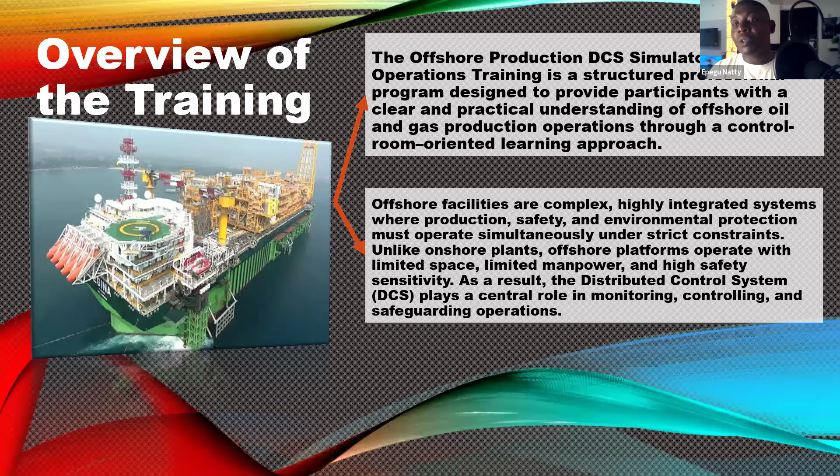And when things are automated, it means the control room is what is doing almost all the work. We have field operators in the field that are going to be doing the field operations, but most of the things are automated, which is why the DCS operation is very crucial, in the sense that you stay in the DCS to monitor, to control, and also ensure that you safeguard the entire operations from the control room.

Now, this training is going to be focusing on offshore operations. We are not going to be talking about design, understand this, we are not talking about design. We are going to be using the HMI to show you how everything is going to work, and all the scenarios in case there is any upset on the plant and all the rest. We are going to do that.

So let's look at the purpose of this training. The primary purpose of this training is to bridge the gap, I think I've said this earlier on. We try to bridge the gap between your theoretical knowledge and actual practical knowledge of what is happening in the field. A lot of engineers, especially undergraduates and non-graduates, in school we are taught the theoretical aspects, and you're told that the separator does this, this does that, but the practical knowledge is actually not there, it's missing. Which is why we are here to bridge that gap.

So at the end of this training, these are some of the things that you're going to go home with. You're going to understand how the overall configuration of the offshore production facility is. You're going to be able to identify major offshore production systems. And then you're also going to be able to interpret the DCS. Now, whenever you see the DCS, you're going to be able to know what is going on, so you're going to understand that.

And then you're going to follow up typical startup and shutdown. If you want to start up the offshore plant, what are the procedures you follow? You're going to understand that. You're also going to recognize alarm situations. When there's an alarm on your screen, you're going to understand why the alarm is there and how to rectify it. And also you're going to understand the role of interlocks and permissives. We're going to talk about interlocks and permissives in day 2 of our training, so let's say tomorrow we're going to do that.

So basically the scope, I think I'll mention some of this. We have a production flow from wellhead through the manifold, and then to the topside where we have the separation and treatment of the fluid, which are your oil, your gas, and produced water. Then we have the gas handling, compression, and then conditioning to remove hydrogen sulfide. We have produced water treatment and disposal or injection. So we're going to look at this.

This is very, very important. Then we are also going to look at seawater treatment. So the FPSO or the offshore platform is situated in a sea where you can't actually be importing or bringing water from outside. So it means you have to treat the seawater and then you can use it for either domestic use or injection to a well. So we're going to look at that.

Then we have chemical injection, to avoid corrosion and a lot of other things. So we have that.

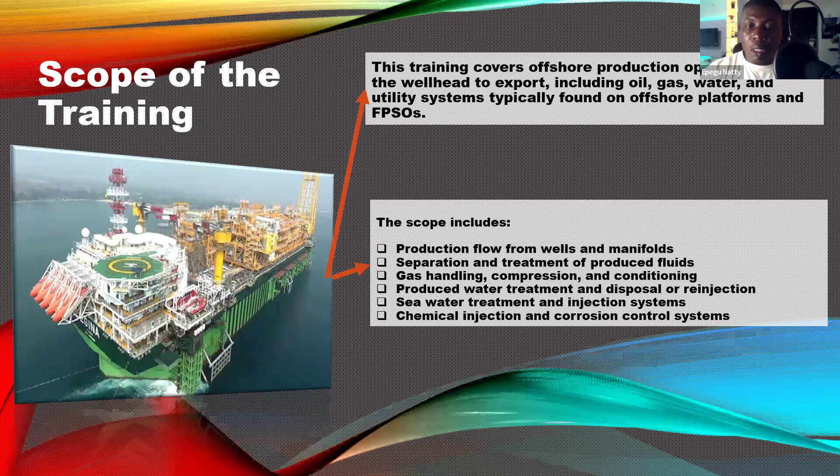So this training does not focus on process design. I think I mentioned this, line sizing, detailed mechanical design. So for mechanical guys that are here, we are not doing mechanical design in this training. For the process personnel, we are not doing process design, but we are doing process operation. So we are not going to be doing equipment fabrication, and we are not going to be doing vendor-specific control systems. We are not doing valve sizing and all the rest. Instead, we are emphasizing on operation. Operation is why we are here.

Okay, so moving forward, our audience, I think we don't need to talk much on this. We need an undergraduate student to be here. We need a graduate student, process engineers, instrumentation and control professionals that want to just know, have an idea or understand what is going on here. And then we have process safety technicians and engineers. We also need chemistry students because in offshore operations we have the lab, and the lab are the ones that actually take samples and give you results. So we need them also to be here.

So basic knowledge - all you need is to be an engineer, or to study engineering, or chemistry, or industrial chemistry, or any of them, and also to just have a general idea of oil and gas and its terminology. Also understand fluid flow concepts, pressure, temperature, and level principles. So that's okay if you have this. But if you don't have most of them, then it's not mandatory - you can just follow up with the training.

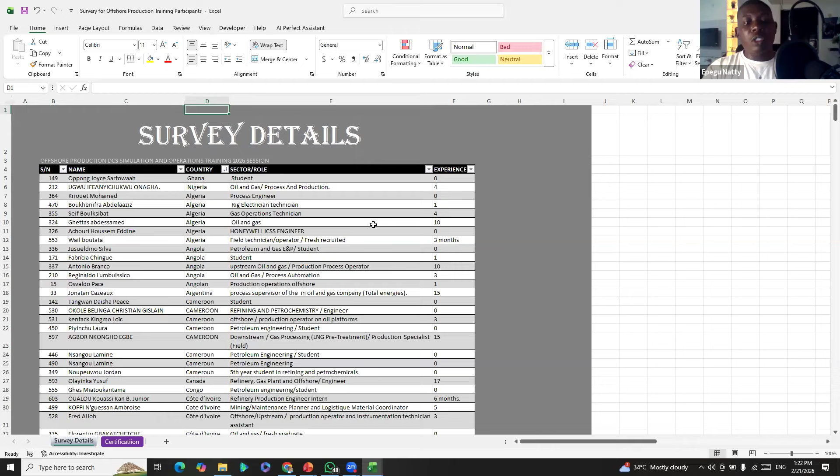Okay, so this is our survey details, right? Now we have about 1,500 persons in the two groups. Out of the 1,500 persons, we have about 700 people that sent their details, which is what I used to actually carry out the analysis.

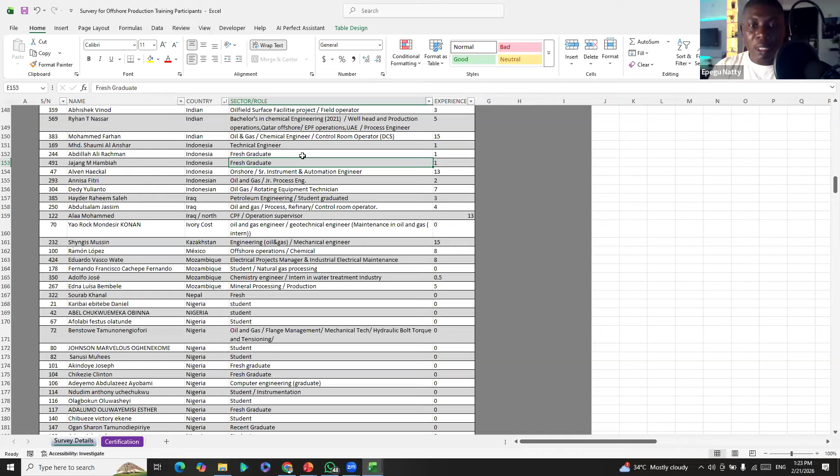Okay, now looking at our survey details, you notice we have a lot of undergraduate students. So let me just sort this out, and let's see.

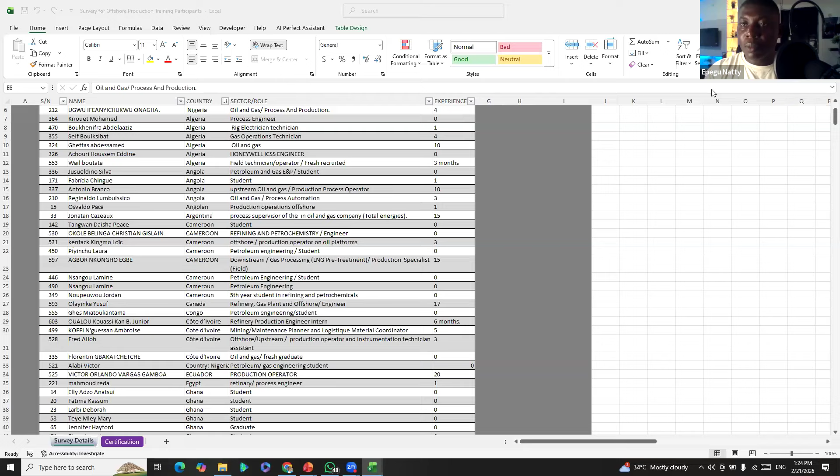Okay, please just help me to mute your voice, okay? Okay, thank you. Okay, we have from Ghana, we have a lot of people from Ghana. We have a lot of people from Indonesia. Yeah, we have a lot of people from India. I think the person I was talking to is from India, right? So we have people from India.

We have from Kazakhstan, Ivory Coast. We have from Iraq, we have from Mozambique. We have a lot of people from Nigeria, okay, a lot of people from Nigeria. And then, okay, we have from Nigeria. Okay, we have from Saudi Arabia. We have from Pakistan, Oman, Tunisia, United Arab Emirates, that is UAE. We have Tunisia, we have Uganda, and then we have UK. Venezuela is also here, okay.

So you see, we have a lot of people here, and you need to understand that this is like a resource to everybody, okay. Now these people are working in different sectors. Most of them are working in refineries. Some of them are working in gas plants. Some of them are working in ethanol plants, right. Now it's a good resource for everybody, especially for the students. So you can reach out to any of them, and they will still give you something.

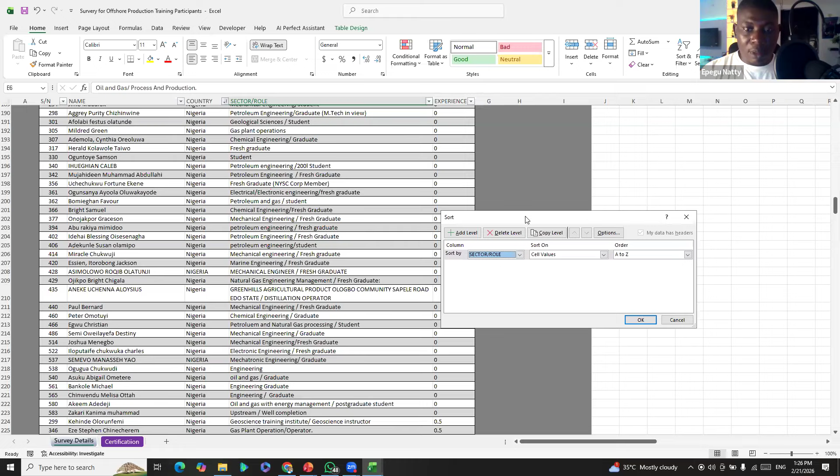So let me sort out their sectors anyway, so we can see. Mr. Angulano, I see you're enjoying yourself. You're welcome. All right, so for the sector, okay, just hold on.

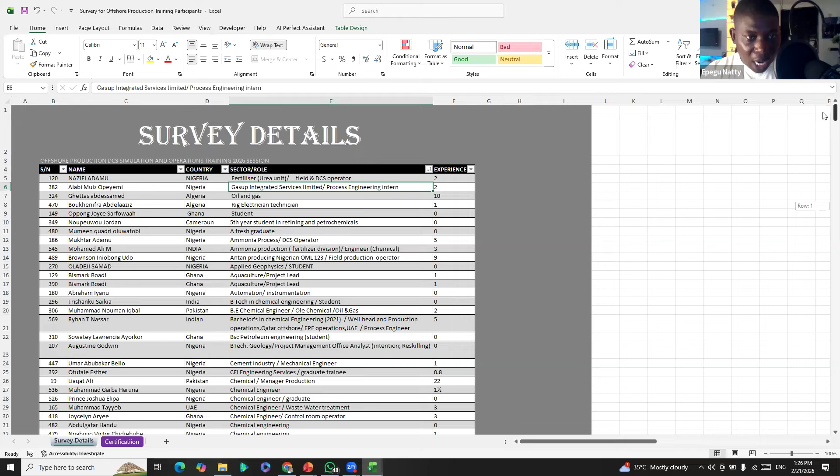Okay, for the sector, now let's look at the sector aspect now. Now I see we have a lot of chemical engineers here. We have a lot of computer engineering students here. We have people from the downstream sector. Now, most of them are DCS operators, right? But they are also here in this training.

So you ask yourself, why is it that a DCS operator is attending this training? Now, the reason is simple. You're working in a refinery, doesn't mean that you can go straight and start working in the offshore, right? Because you need to understand the process, the operations that is going on there. You need to understand the entire value chain, the system. So which is why they are here. Now, being here gives you that advantage, right?

Whenever you see an advert online and you see an offshore role, like a DCS operator or field operator, now as somebody working in a refinery, you can never apply. Even if you apply, you're wasting your time, right? That's because you don't have the certification, you don't have the knowledge, so you can't do that. Now, this training is going to help you do that.

Now, you might have 50% chance of getting a job, but let's say 30%. At least you have a percentage that when you apply, you can get a job.

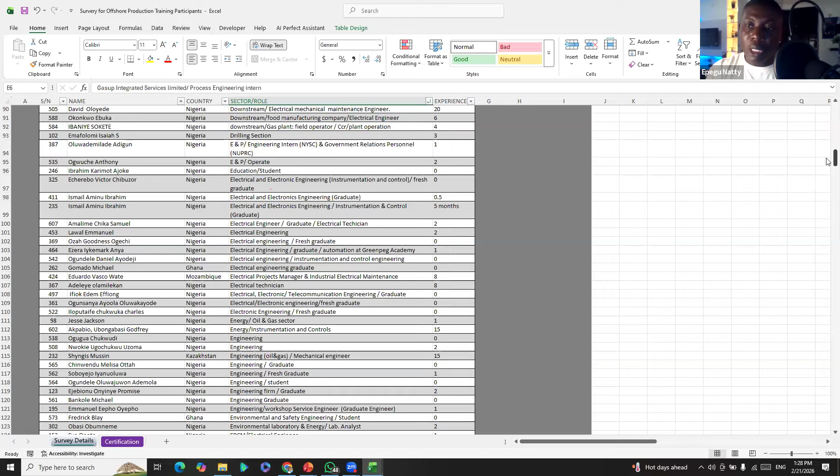We have E&P, exploration and production, people here. We have people from the education sector, some of them are lecturers. We have electrical engineers too. Electrical work is the same from downstream and upstream, but you need to know the equipment you're going to connect, which is why understanding the process is very important, and understanding the equipment we have is also important. Then we have fertilizer people here, people from geology, and gas processing plants. So as you can see, we have people from a lot of industries gathered here.

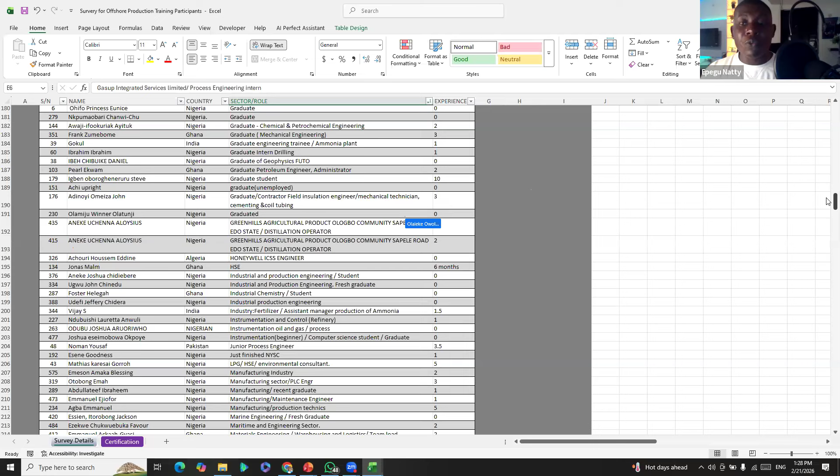Now, some of them have 25 years of experience. For you to have 25 years, it means you might be a manager, operations manager, or a supervisor. So here you have it, people that can actually help you get to somewhere. Even if you're not going offshore, you can get to another sector with these people in this group.

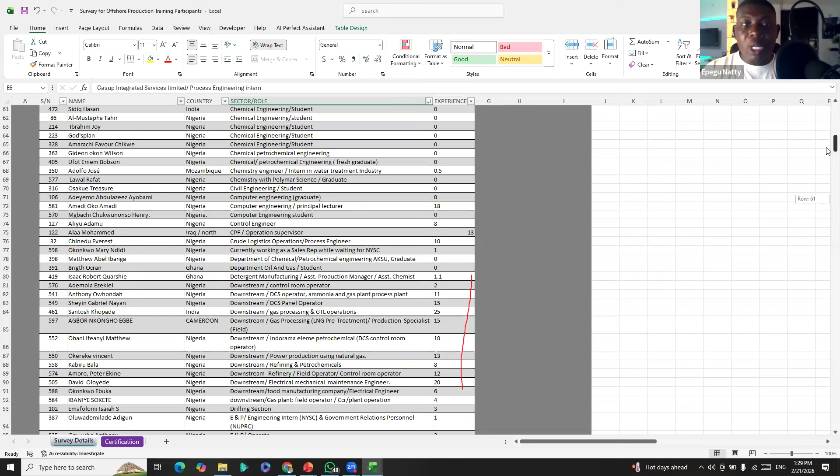I will plead to everybody, if any of the participants here reach out to you, please just pay attention and try to take the person along.

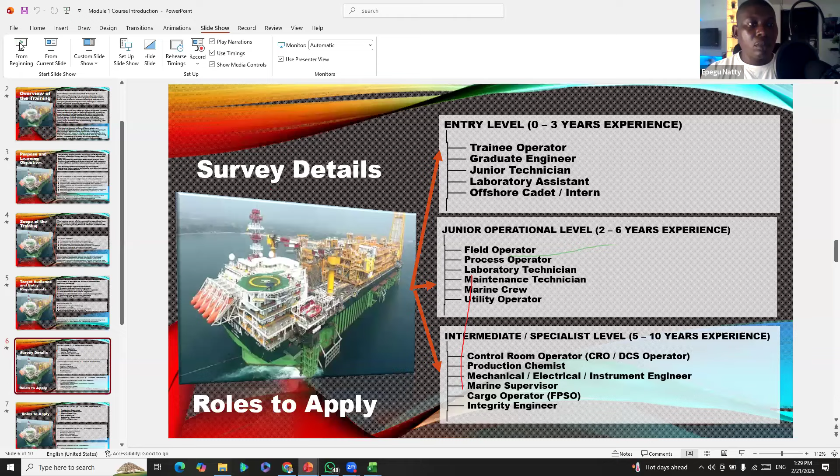Okay, so let's go back to our slide so we can continue from there. I think we are here, right? Okay, we are done with this. We are here. So the next thing here, oh sorry.

Okay, so the next thing here is the roles to apply. Now, this is for the undergraduate and graduate students. You study chemical engineering, that doesn't mean you're going to work as a chemical engineer. You need to be specific. You need to streamline yourself to a particular role. You are not going to work there as a chemical engineer. Nobody knows you as a chemical engineer or petroleum engineer there. You are going there as...

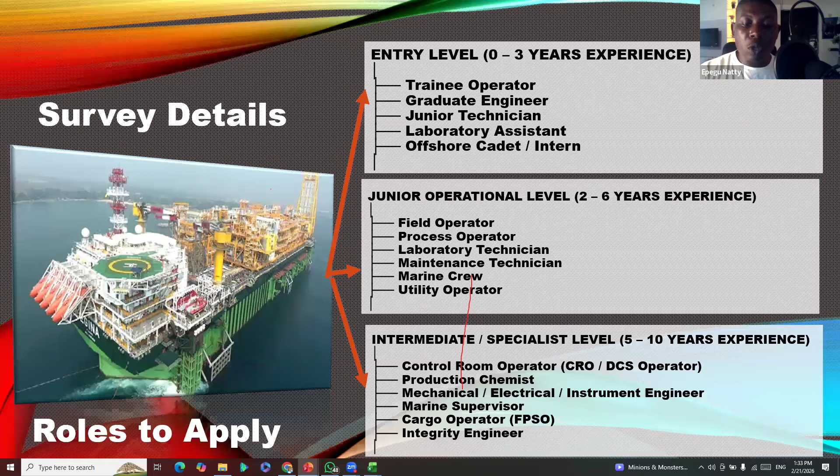So if you have 5 to 10 years, you can attempt to apply for a control operator job, production chemist, mechanical engineer, electrical or instrumentation, marine supervisor, cargo operator, and integrity engineer. So from 5 to 10 years, you can do that.

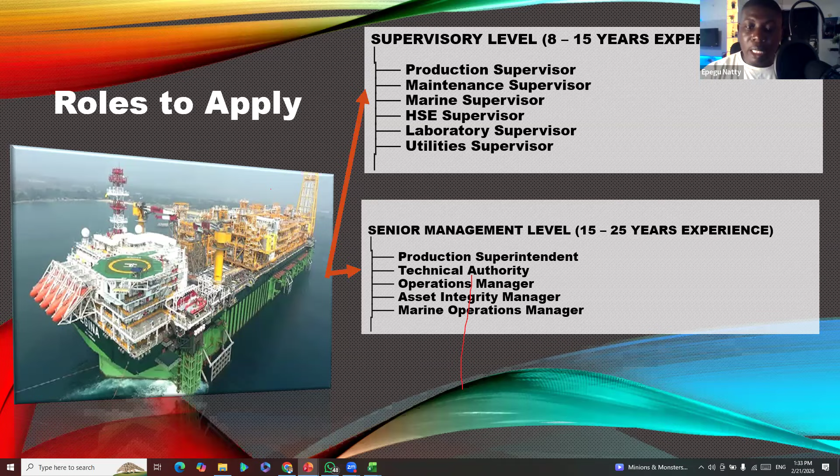And then also from 8 to 15 years, you can go for a supervisor for production and maintenance, supervisor for marine, HSE supervisor, laboratory supervisor, and utility supervisor. If you have 15 to 25 years, you can go for superintendent, and then operations manager. Then if higher, you can go for offshore installation manager, OIM, which is almost like executive level.

All right, now let's go over to assessments.

Assessment is very, very, very important and is strongly encouraged. Now, this training, we want to expose you guys, expose everybody, to be able to build up your intellectual capacity in terms of you want people to know what you're doing. So I encourage people that you don't just go for a training and then at the end of the day, just post your certificate online saying you have just completed the training.

For me, if I am an HR and I come to your LinkedIn profile, and what I see is just you posting your certificates, I will not see anything to employ. It will not be employable to me, that's my take. Now if you show some level of information and things that you've learned over the years, then somebody can actually say, okay, this person might have an idea on this, let's give him a try and call him for interview.

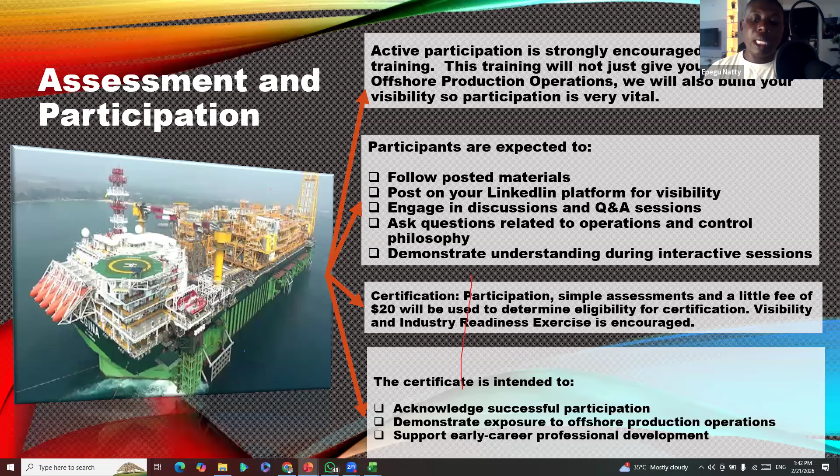Okay, so for certificates, it is actually to acknowledge your successful participation. It is to also demonstrate your exposure to offshore production operations, and also to support the early career professionals, especially for the graduate students.

All right, so next is I just added this on for you to see the standards involved in offshore operations, but most especially in terms of design. So you can just go online and look at this and maybe read to get more knowledge. So we have ISO 19900, that's General Offshore Structure Principle. We have ISO 19901, Environmental Loads. So you can go online and check all these standards, okay?

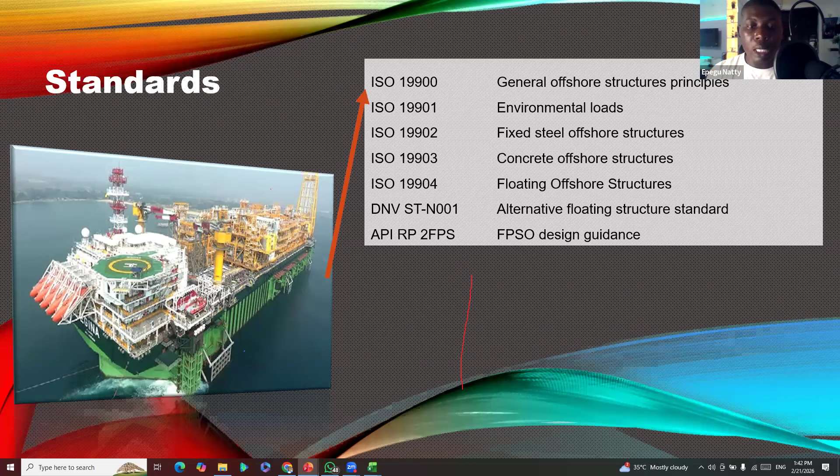So I think the one that interests me most is ISO 19904, which is for floating offshore structures. So you can go there and learn, and also the engineering aspect of it. You can look at, they talk about the structural design philosophy, environmental loading, hydrodynamic analysis, stability and flotation. So if you want to get more knowledge, just download these codes for you to read more.

Okay, so this is where we stop at module 1. So this is just overview of our training. Now, the next we are going to start the fundamentals. So any questions, let me just go to our comment section.

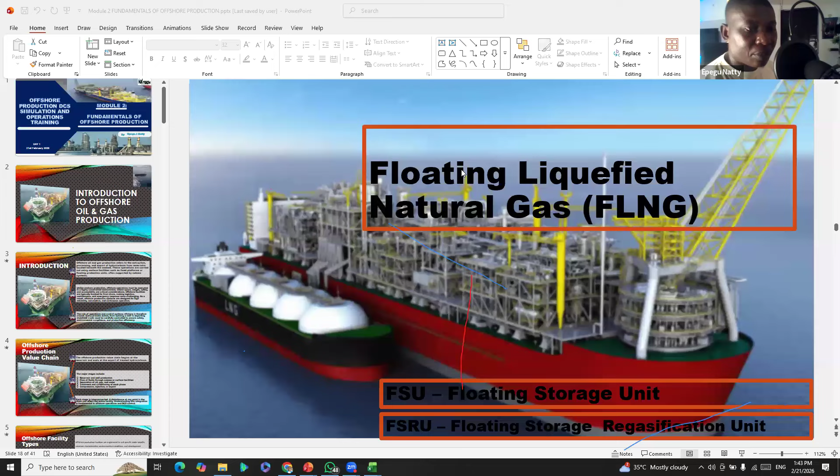I just want to ask you a naughty question. How will this skill really help in power plant operation? Because I'm an instrumentation and control engineer, but I work in a power plant station. I'm from Nigeria, but the job takes me to Angola. I'm on Luanda Island.

So how is this job related to power generation? For me, I think you shouldn't relate power generation to what you're learning here. Relate instrumentation to what you're learning here, because that's your professional field, instrumentation, right?

Yes, instrumentation. Exactly, so that's what you should relate to what's going on here. Now, instrumentation in all sectors is almost the same thing. In your power generation, I believe you have control valves, transmitters, temperature and pressure transmitters, and flow control valves, right?

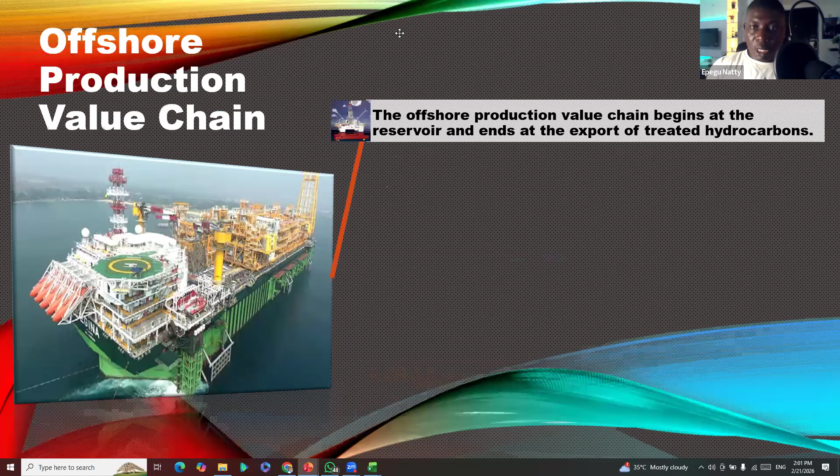So let's look at the value chain now. The value chain in offshore is very simple. We are starting from reservoir, and then the well production. Because we have a lot of undergraduates here, we are going to go down to even talking about the reservoir in this our course of study. I think that will be in day 3 of our training. Now the flow of fluids from subsea down to surface facility, separation of oil and gas, treatment and conditioning of each phase, and then compression, injection, and export.

So this is the value chain. It starts from reservoir and ends at export. Now each of the stages is interconnected.

If there is any problem at the export terminal, especially for fixed platforms where you are not storing the crude, if there's any problem at the export pipeline, it means you have to shut down. So everything is interconnected. If there is any problem at the gas compression station, we have gas coming in, so you have to compress it and send it out. If you cannot send out gas, it means you have to shut down because the pressure of your lines will go up, and before you know it, it's kaboom. So everything is interconnected. A disturbance at any point in the chain can affect the entire operation.

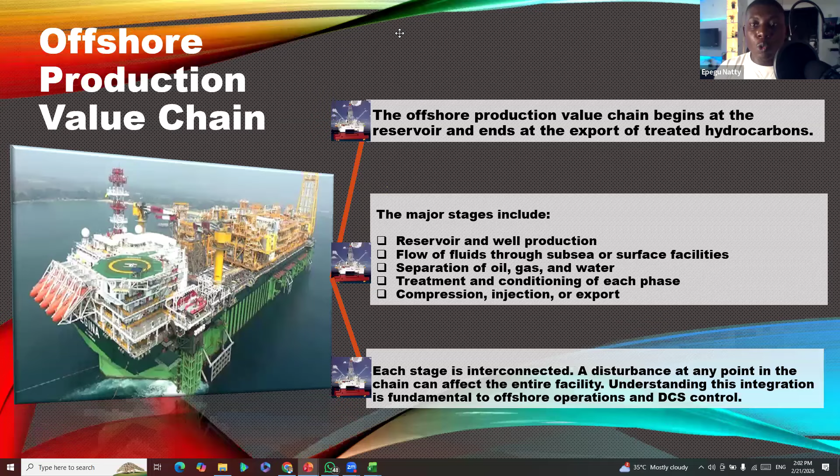Understanding this integration is fundamental to offshore production and DCS control. All right, so like I said, we have different types. So here is where we talk about the different types of offshore.

Now during an interview, if you want to go and work offshore, the person interviewing you can actually want to test your brain to know if you really understand offshore, right? Now let's say somebody asks you: you are going to be working in a fixed platform, and you are going to be storing the crude for, let's say, 1 week, like every 1 week you send out the crude. What will be your response?

It's a fixed platform, meaning you can't store crude. You have to export it out. But the person is telling you that we are storing crude for 1 week or 2 weeks before it sends out, right? So that's just testing you to know if you actually know that a fixed platform doesn't have a storage system, okay? So these are the things you need to know. That is why you need to know the various types of offshore. So let's start with number 1.

Okay, so number 1 is our fixed offshore platforms. As you can see in the image, this is a fixed offshore platform. Now we have various types, so we'll talk about the various types of fixed platforms also.

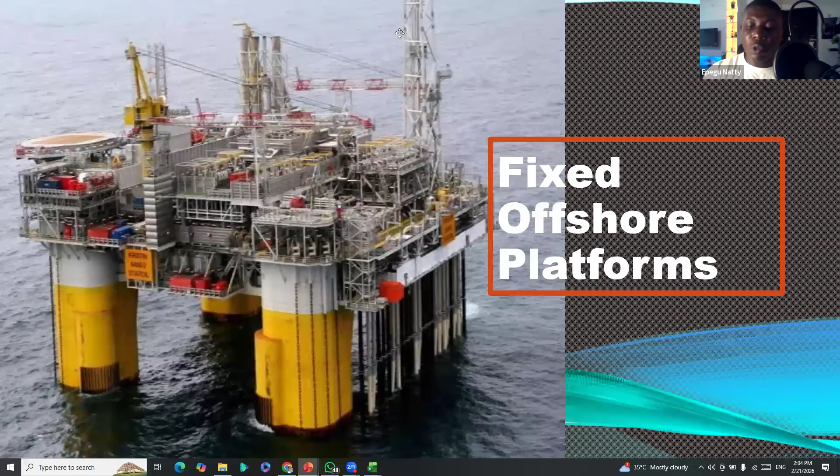So for fixed platforms, these platforms are rigid structures. Look at the image here, you see that they have rigid structures used to support the topside, and then these structures go all the way down to the seabed where they are anchored. They have anchors that are used to anchor on the ground. They are most commonly used in shallow to moderate water depths.

Since they are going to be anchored on the floor, it means you can't take it to somewhere too deep. Somewhere around 100 to about 400 meters, you can have something like this. But if you have about 1,000 meters deep, you can't be using metal plates to support your platform. So if somebody asks you to work on a fixed platform where the water depth is about 1,500 meters, you will know it's not possible. It has to be something else.

It has to be either an FPSO or maybe a Spar unit. So just understand that for fixed platforms, from 100, 300 to about 400 meters, that's where you find a fixed platform, depending on the structural design. We'll look at the structural design later.

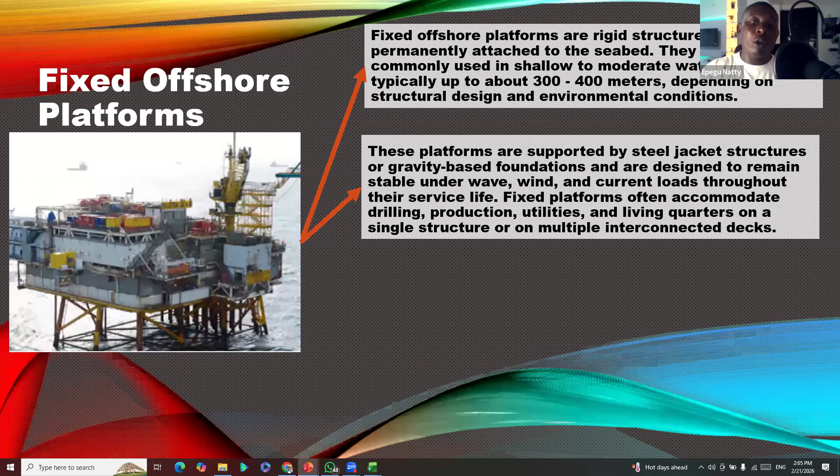Now these platforms are supported by steel jackets. So those legs we're seeing are called steel jackets. And then we have gravity-based foundations. We're going to look at the GBS later. For now, let's look at the steel jackets.

These are used to make the platform stable under wave, wind, and current load. Since it's supported, it means when there is wind, you can't actually push it, because it's very rigid. When there is a wave, the wave cannot actually push it either, except maybe a very high wave can collapse it or push it aside. But for some kind of wind, you can support it.

Now fixed platforms often accommodate drilling. For a fixed platform, you can carry out drilling while producing on, let's say, 1 to about 10 wells. They can be drilling other wells using directional drilling. So you can see the drilling rig mounted on the fixed platform while production is also going on.

We have utilities like boilers and other utilities, and then we have the living quarters also. They are on a single structure or multiple interconnected structures. We are going to look at that also later on.

Now fixed platforms are designed to withstand waves, as I talked about. They can stay for about 25 to 40 years before they can be decommissioned. Fixed platforms accommodate drilling, production, utilities, and living quarters, as I've talked about. So let's go over to the next one.

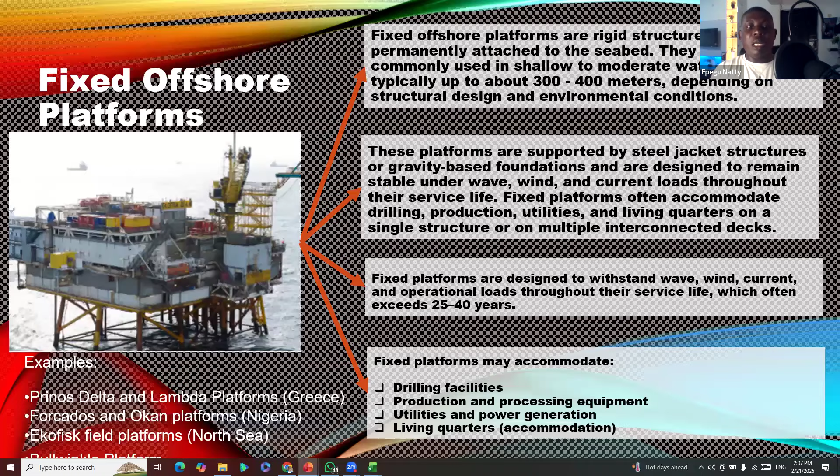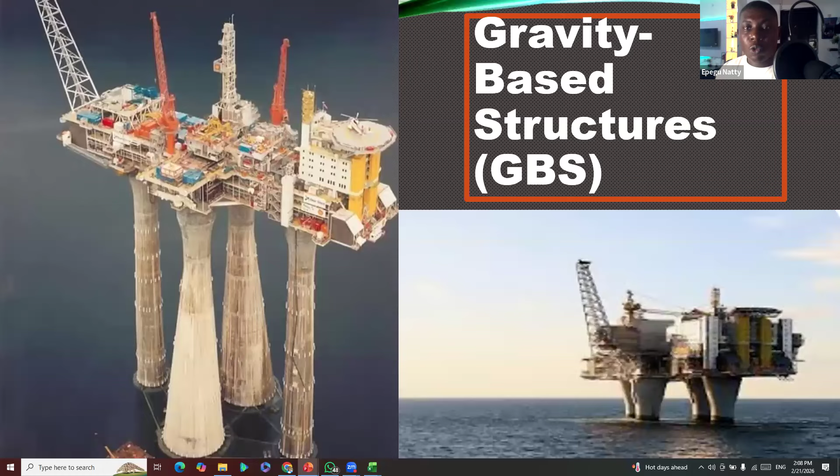GBS stands for gravity-based structure. You can see the structure here, it is made from concrete cement. So these are the structures used when you have somewhere with a lot of environmental disturbance, especially like ice blocks or snow. That's the kind of location we use GBS for. And GBS can also store crude, which is why it's used.

Now GBS are a special category of fixed platform that rest on the seabed. They rest because of the load, you can't actually make it float. So they have to rest on the seabed, and they are mostly used in very shallow regions, maybe a water depth of about 30 to 100 or 200 meters. That's why they use GBS.

So the operational characteristics of GBS are extremely stable, very low in motion, because it's very heavy, so nothing can push it. And then they integrate storage capacity. So the GBS, you see the hull here, they can actually store crude on it, then later discharge to either a tanker or through export pipeline.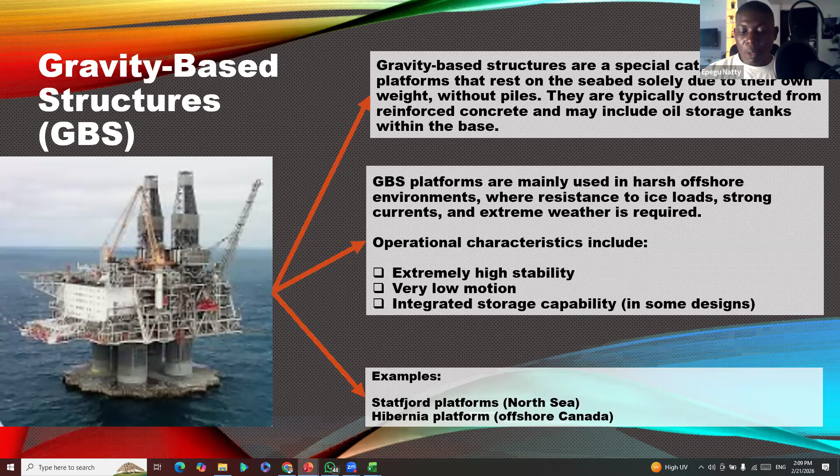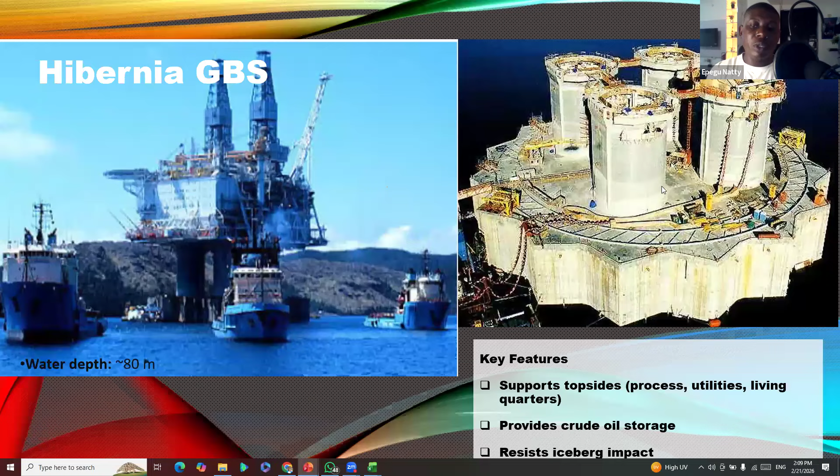So for example, we have the Statfjord platform, and then we have the Hibernia platform. Now this Hibernia is one of the largest oil platforms, you can check it out. It's in Canada. Now this is when they were towing the entire platform down to the location. You can see the image, and the water depth here is just 80 meters. Then you can see the structure - this is where the crude is being stored, and then these angles are used to actually break ice. They are called ice crackers. Okay, so we are done with that.

The next is our compliant towers. Now, compliant towers are also fixed platforms. Let's look at what the compliant tower is. So these are narrow, flexible offshore oil and gas platforms designed to withstand environmental forces by swaying slightly rather than resisting them rigidly. So for the fixed platforms, they are positioned in a way that you can't move it. Now for these compliant towers, they are also sent down to the seabed and anchored, but they are more slimmer, and then they can sway, right? So if there's a wave, they can just sway and then balance up. So that is the essence of this.

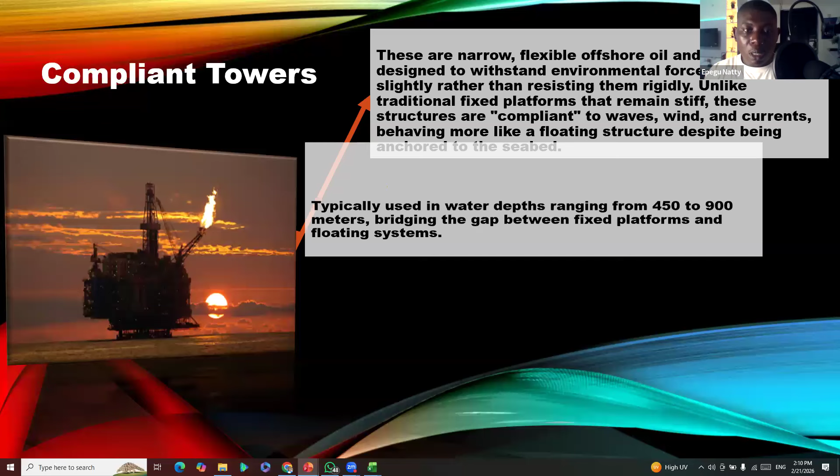So they are typically used in water depths ranging from 450 to 900 meters. So instead of using fixed platforms, they use compliant towers if you see a water depth of 450 to 900 meters.

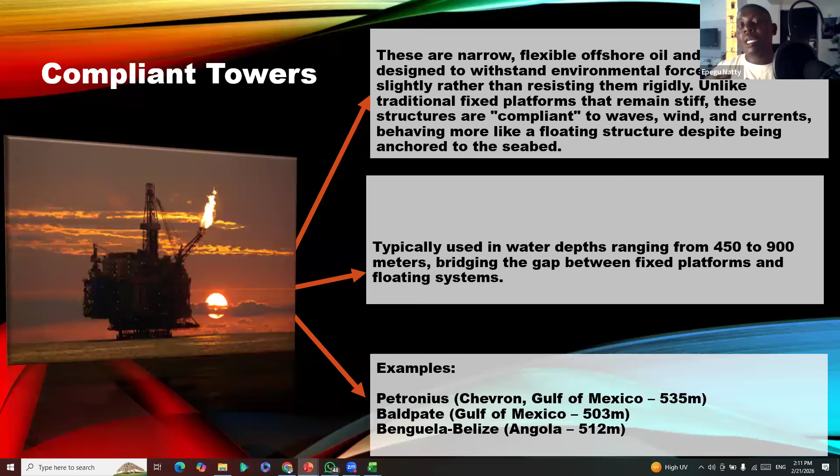Example of this is the Petronius platform. It's in the Gulf of Mexico and is handled by Chevron. And then we have the Baldpate platform. We have the Benguela Belize platform - this is in Angola. Now for the Petronius, the water depth is 535 meters. For the Baldpate, the water depth is 503 meters, while for the Belize it's about 512 meters. So even if somebody asks you where you're going to work and the water depth is let's say about 800, you know that what you have there is a compliant tower - either a compliant tower or maybe FPSO or some other ones, but not a fixed platform. Hope you understand this concept.

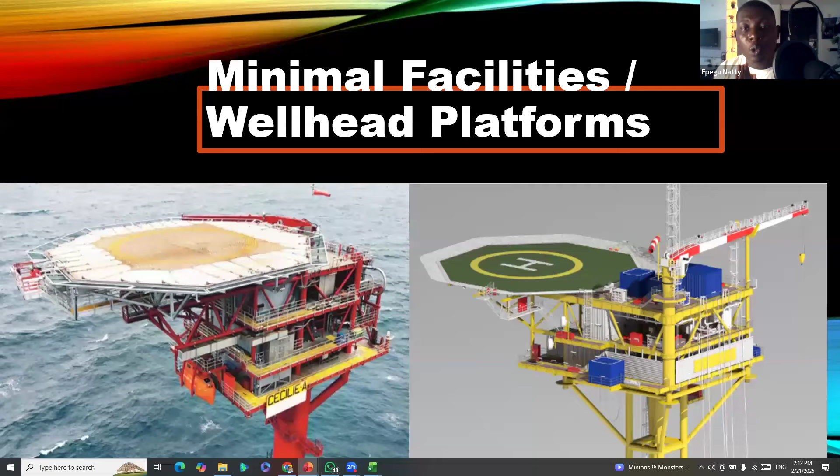Okay, so the next one is the minimal facility and wellhead. So if you are from Nigeria and you stay in the Niger Delta part of Nigeria, you know, if you are going through a boat, you find out that you see some small platforms with a wellhead, a dry wellhead on it, right? Those small platforms are called wellhead platforms. Now, they are not platforms that people can go and stay on, or production cannot go on that kind of platform. So for that platform, it's just to extract the crude and then you send it through pipeline to OPF, or you can also send it to maybe FPSO if there's any other facility close to it. So that is what we call wellhead platform or minimal facility. It's very important that we know this difference between all these kinds of platforms.

So let's look at the interpretation. They are offshore installations designed primarily to support well drilling, completion and initial production control. So they use it for initial production before you can bring in a bigger platform, like maybe the FPSO or something else. Now, their main function is to host the wellheads and the Christmas trees while produced fluids are routed to nearby host facility for full processing. Now, these platforms are typically used in shallow to moderate water depths and are especially common in satellite fields development, marginal or small reserves, early production schemes, and brownfield expansion where a central processing platform already exists. Unlike the full production platforms, separation, compression, dehydration - all these cannot go on. Instead, multi-phase fluids are exported via flow line to a central processing facility.

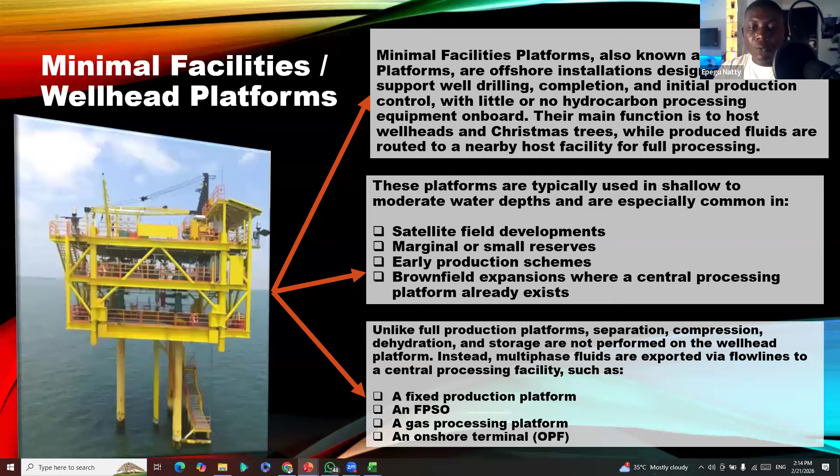The fixed production platforms, FPSO. Okay, so let's go, we are done with fixed platforms now. So don't forget, we mentioned for fixed platform, we have fixed platform with steel structure, we have the one with GBS, we have compliant towers, and then we have the wellhead and minimal platforms. So we are done with fixed platform. Now we need to go over to floating production system.

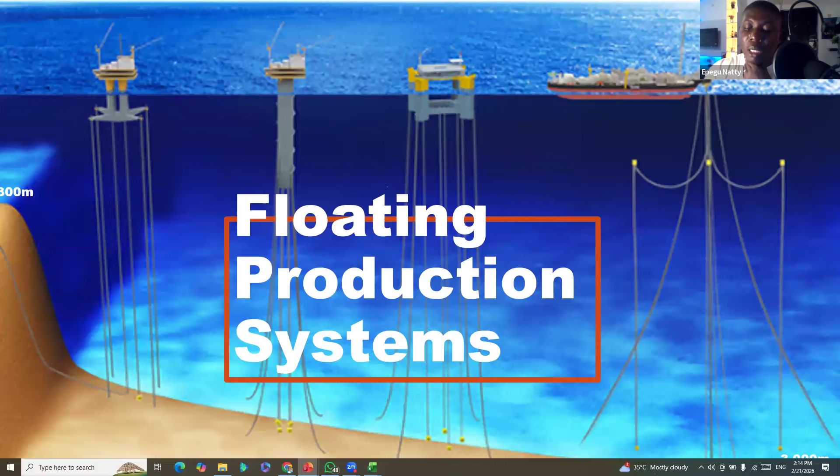Okay, now these are systems that can actually float. They are not anchored on the seabed; instead, they use mooring lines to anchor them, but they're actually floating. These images show you some types of floating production systems, but we'll look at them one after the other. Floating production systems are used in deep water and ultra deep water environments. Deep water means water depth from about 500 down to about 1,500 meters. Ultra deep water means a water depth of 1,500 meters and above, very deep.

For FPSO, they are particularly popular because they combine processing, production, storage, and exports. Floating facilities are widely used for deep water, remote locations, and fields requiring flexibility or redeployment.

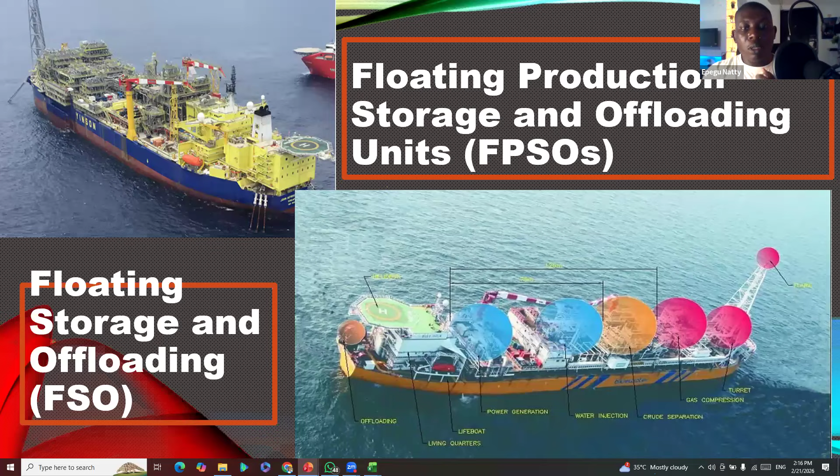Now we also have another one called the Floating Liquefied Natural Gas unit. This is for gas - if you are producing a gas-only well, then we have these floating units there. Then we have other ones called the floating storage unit, which is just for storage. This smaller vessel by the side is a floating storage unit.

And then we have what we call the FSRU, floating storage regasification units. That unit is used to regasify the compressed gas. For gas to be sent to the export terminal, it's most likely going to be compressed to about minus 162, 165 degrees Celsius, to turn it to liquid so you can store it in the FSU. But what if you want to export through pipeline? You need to regasify the compressed gas back to normal gas at room temperature - that's where we have the FSRU.

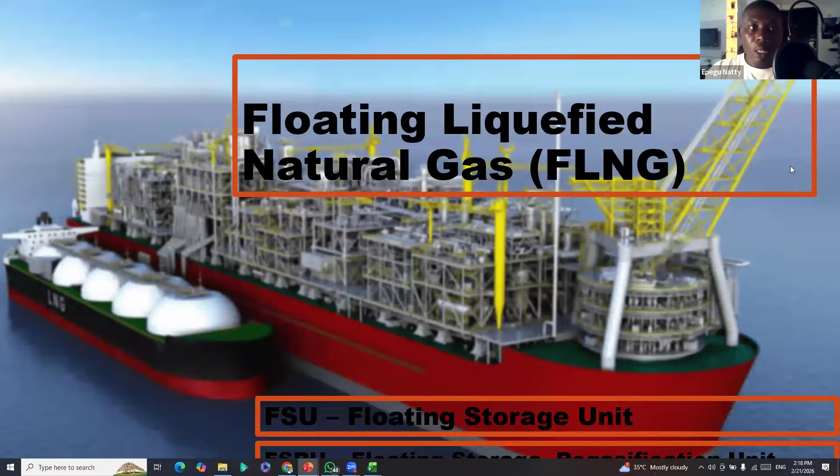So floating production, storage, and offloading units - that is FPSO. If you're hearing this for the first time, understand that FPSO means Floating Production - that's F, S stands for Storage, and O stands for Offloading. You can see the various parts: risers, which we'll go through, the mooring lines, the mooring system, the turret is also there, the storage tank, and the top side. The top side is actually everything on top of the FPSO. Then we have the offloading facility.

So FPSO are floating ship facilities that are integrated - production, processing, crude storage, offloading to shuttle tanker are all integrated on the FPSO. FPSO are particularly attractive because they eliminate the need for export pipelines, making them ideal for remote or marginal fields. Water depth for FPSO is about 100 to 2,900 meters - any place in that range, the FPSO can be used.

The key operational characteristics of FPSO include large onboard crude storage tanks, periodic offloading operations, and the turret or spread mooring systems. Let me just talk about this turret a little bit.

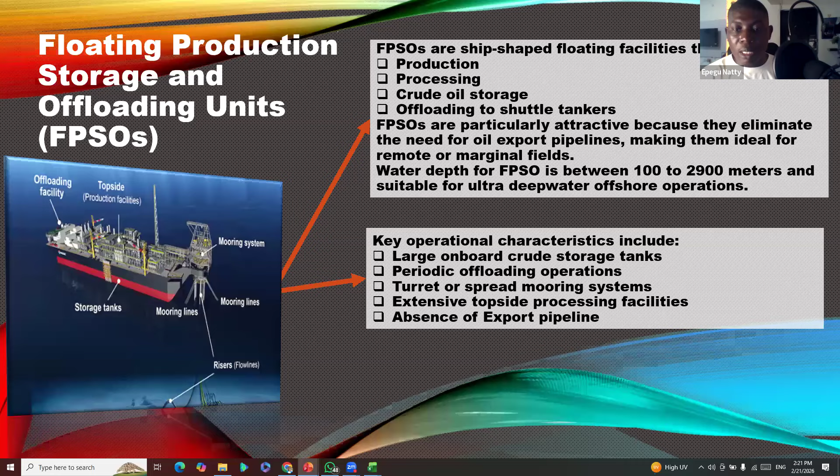So that is that. Now we have extensive topside processing facility, then we have the absence of export pipeline. Okay, so let's look at examples of FPSO.

In Nigeria, we have one of the biggest, I think Bonga can process about 225,000 barrels per day. So that's what it can process per day. It's one of the biggest FPSO in Nigeria, located at OML 118. There's a reason I mentioned this OML 118.

Later on in this course, we're going to look at all these terminologies. We have the Agbami FPSO platform, OML 127 and 128. We have the Girassol FPSO in Angola, Block 17. We have the Erha FPSO, that is in OML 133. We have the Akpo FPSO. We have the Abo FPSO. And I think there is one going to these states in Calabar also, one new one, I've forgotten the name, but there is one new one there.

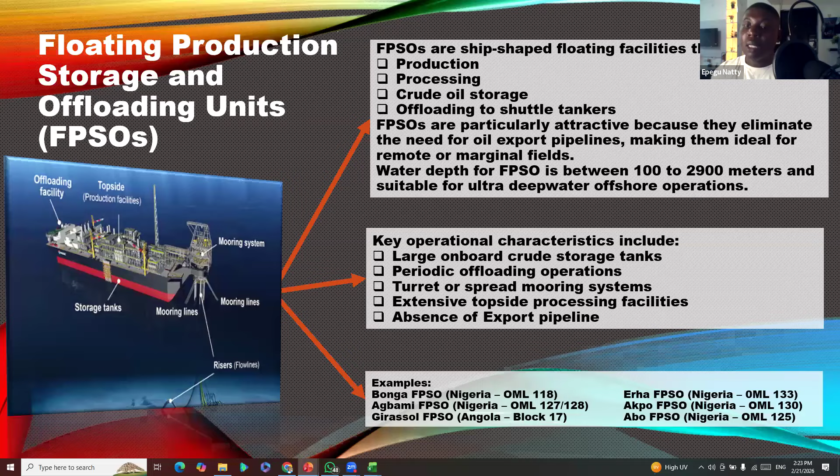So these are different types of FPSO. You can just Google it, look at their production capacity, get more idea about the FPSO, follow up with your company and see if there's any vacancy. If you're in Ghana, do the same thing, go online and check for FPSOs in Ghana. Follow up with their operators, because most of them are operated by Chevron or Shell. Just look at the operators and then look at opportunities.

All right, so you can see the mooring system. This is the mooring system. Now everything is anchored at the mooring system, and all the risers, including the umbilical line, come through the mooring system.

Next we have the semi-submersible production platform. Why is it called semi-submersible? Semi means some part of it is submerged inside the water, while the rest is visible, but not the whole part is submerged. That's semi-submersible. Now what is making it float is what you call the pontoon.

Now you might ask yourself, why is it that the swamp buggy is floating? Because they are used to operate in areas that are very swampy, in riverine areas, so they can float, and they are floating because of what they call the pontoon. The same principle applies to semi-submersible production platforms. Just imagine a very heavy platform like that floating - it's because of the pontoon, and it has been designed to carry the weight of everything at the topside.

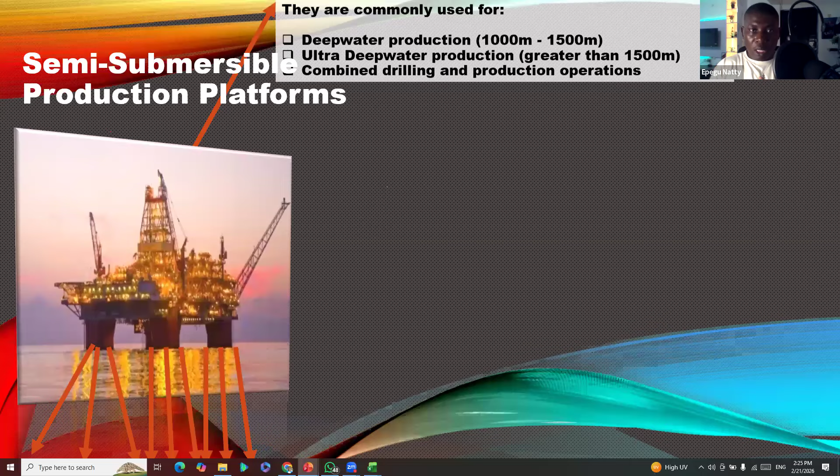So let's look at that. Now, the semi-submersible platform consists of floating pontoons and vertical columns, designed to minimize motion by keeping most of the structure submerged below wave action. They are commonly used for deep water production of 1,000 to about 1,500.

These values are very, very important. If you are asked in an interview which kind of platform will function in a water depth of about 1,000 to 1,500 meters, the options you have are FPSO, since FPSO works from 100 to 2,900, and semi-submersible, since a fixed platform cannot work here. So you need to know this. These water depth values are very important.

So we have ultra deep water production. I told you ultra deep is anything greater than 1,500 meters. Semi-submersibles can even be used at about 1,800, 1,900 to 2,000 meters. That's where semi-submersibles can actually work, and they combine both drilling and production. They can actually drill on this type of platform.

Now, next is the operational consideration. We have the ballast control system, station keeping and mooring integrity, and wave motion aware process control.

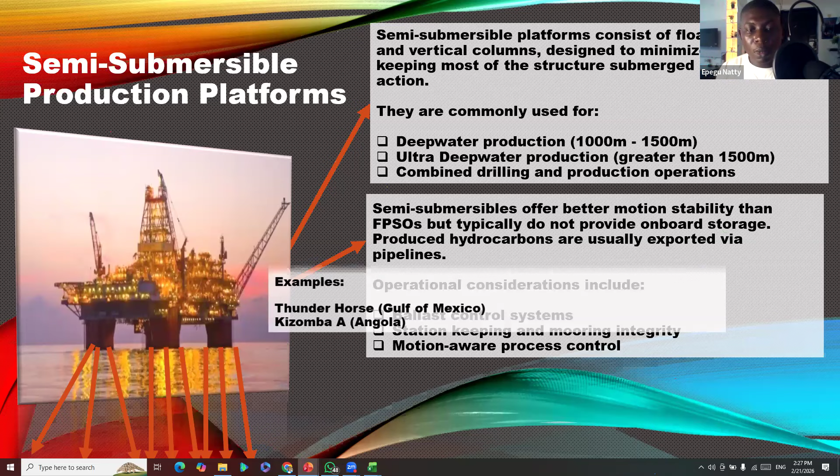An example is the Thunder Horse. Please always check out these examples online after class. You also have the Kizomba A, which is in Angola. So we have these two as examples for semi-submersible.

So the next one is the tension leg platform. From the name tension leg, it means it's something that is tensioned. For the semi-submersible, it is not tensioned, we have a mooring system, but it is slacked, not tensioned, just something slack that enables it to stay at one location. But for the tension leg, they are tensioned down to the seabed using what we call tendons.

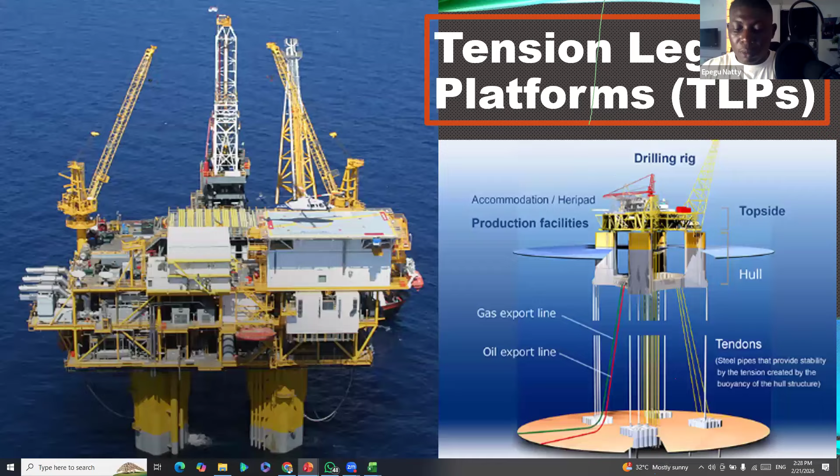So TLP. For the TLP, like I said, the tension, they almost work as a floating system because they are floating, but then the tension keeps them at one location. They can be used at very shallow areas, up to 400 meters, and also for deep water from 1,000 meters to 1,500 meters. And they most likely have dry tree wells.

Dry tree wells are wells that can be mounted on top of the platform at the top side, that's why they're called dry tree wells, because they are not wet, not inside the subsea, they are at the top. Because they are used to reduce vertical movement, TLPs allow for direct access to wellheads on a platform, and they are similar to a fixed platform. This simplifies well control operations, but introduces unique structural and operational considerations.

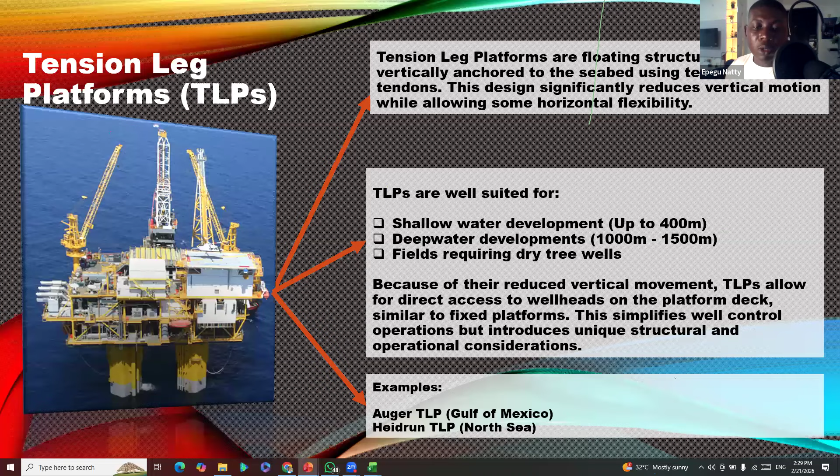An example of TLP is the Auger TLP in Mexico, and we have the Heidrun TLP in the North Sea. Then we have the Spar.

The Spar is going to be the final example for the floating systems. As you can see, the Spar has just one hull system that is submerged inside the water, and the other part is at the surface holding the platform together. The water depth for Spar is above 1,500 meters, so the Spar is actually used for ultra deep water systems.

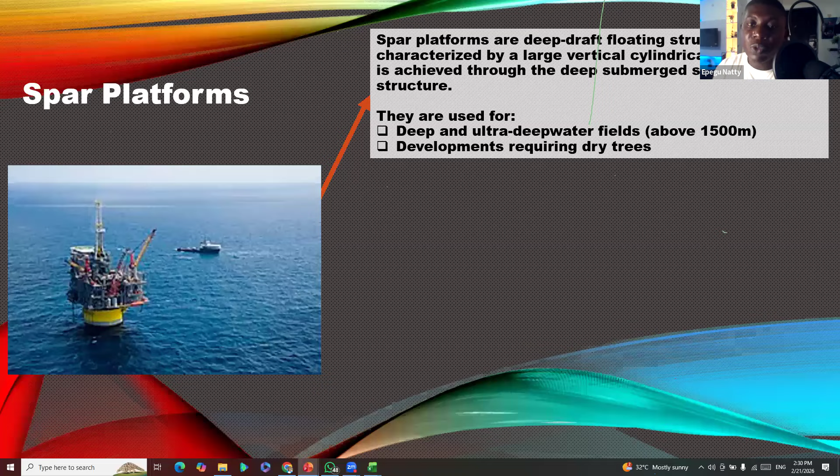Then we have a very deep environment, that's where you use the Spar, around 2,800 to 3,000 meters. So if somebody asks you, we have a platform and the water depth is about 2,000 to 3,000 meters, you know it's going to be a Spar.

The operational features of the Spar are excellent motion performance, complex mooring systems, and high installation and construction costs, it's very cost intensive. An example is the Perdido Spar, which is also one of the biggest platforms in the world. Check out the Perdido platform, and we also have the Aasta Hansteen platform in Norway.

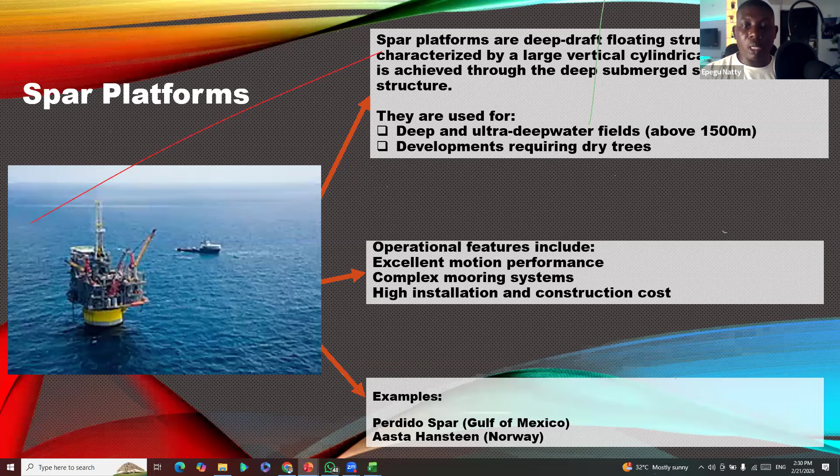Okay, so let's look at the subsea production system. In your engineering classes, there is a course titled Surface and Subsurface Production. Surface is the top, subsurface is anything below the ground. For offshore, we have another layer called the subsea. So the subsea is what differentiates offshore from onshore. For onshore, there is nothing like subsea systems, but for offshore, we have the subsea. Every other thing is almost the same, except the space and the type of platform used.

Now we are going to look at the subsea system. Subsea is a very broad topic. We have a lot of equipment and a lot of engineering going on currently, so we can't talk about everything about the subsea, but we'll look at it step by step. We'll look from the wellhead down to the platform, and look at all the equipment needed on the subsea. For this module 2, we are just going to introduce the subsea systems.

So if you look at the image by my side, you see the flowline jumpers, the pumping station, and a manifold. You have different wells, about 7 wells surrounding one manifold. The manifold, just like the manifold in the downstream sector, is just a pipe with connectors connecting to it, then sent to maybe an equipment. This is what a manifold in subsea looks like, but we are still going to look at this later on.

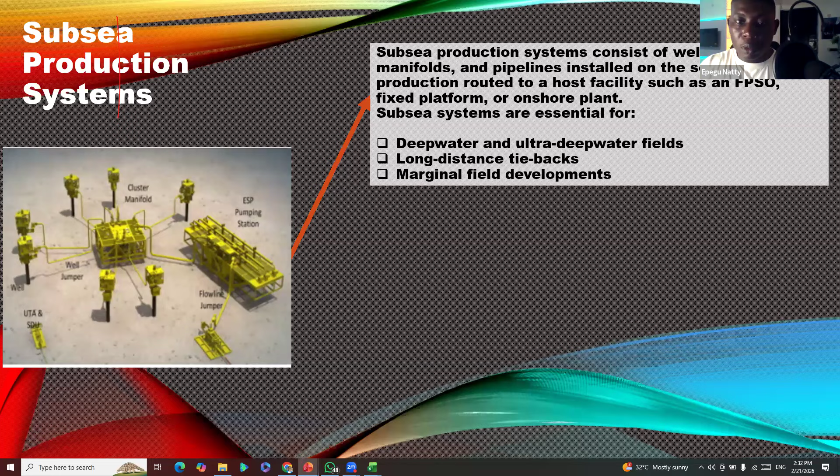Because subsea equipment is inaccessible during normal operation, these systems rely heavily on automation. Everything at the subsea relies on automation, because the only way you can go down to the seabed to carry out any maintenance is by going through what they call an ROV, remote operated vehicle. That's the only thing you can use. Divers cannot really go down deep to do any maintenance work, so everything has to be automated.

Now, operators typically control subsea systems entirely from the control room. So everything is done from the control room, making DCS reliability specifically, especially important, very, very important.

So subsea systems, we don't need to talk about the types, but let's look at Egina subsea systems, and then we have BC 10 in Brazil.

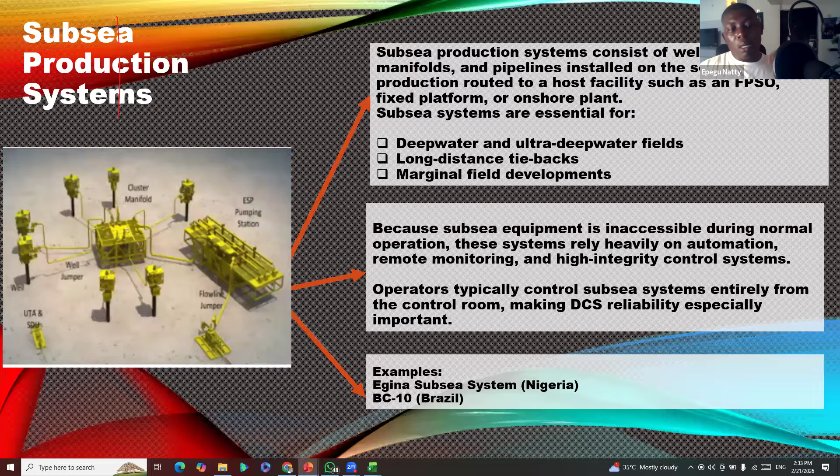In some instances, you can have one platform that is just focused on utilities, generating utilities and sending them down to the other platforms. Then you can have just one platform for only processing, another one for only draining, and all of them are linked together. That's integrating various offshore systems.

So modern offshore production often combines multiple facility types into a single integrated system. For example, subsea wells tied back to an FPSO. An FPSO can also be tied to a subsea well from another platform. We have fixed platforms connected to subsea clusters, then multiple FPSOs sharing one export infrastructure. That is integration.

These integrated systems increase operational complexity and require advanced control strategies, clear operating philosophies, and well-designed HMIs to ensure safe and efficient operation. Understanding the interactions between these different facility types is very, very crucial.

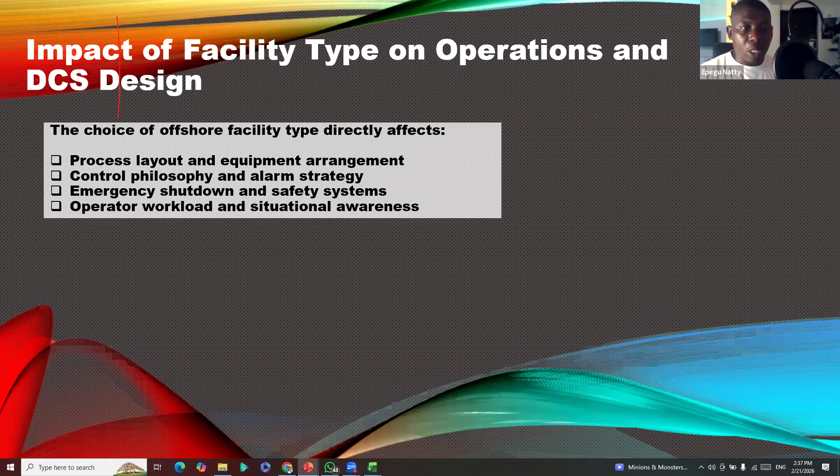Okay, so a simplified offshore production process generally follows the sequence. Hydrocarbons flow from the reservoir through wells, fluids are routed to manifolds, and then flow lines. All this is happening at the subsea level. The multi-phase fluid enters separation units. Now this is at the topside. Oil, gas, and water are separated and treated at the topside. Oil is stabilized at first, second, and third separators, and then sent to export terminals. Now, before they send to export terminals, a lot of treatments are going to take place, okay?

Because of environmental regulations, they have to reduce the hydrogen sulfide level to, let's say, about 5 ppm, or maximum 50 ppm. So you have to treat it. And for the gases, you have to compress the gas, you have to also treat the gas. So a lot of things take place before we get to export terminals. The gas is compressed for export, injection, or fuel. Our gas is also used for injection, so I think we're going to look into this also. Then the produced water is treated and disposed of or injected. So for all the platforms, this process will take place, okay?

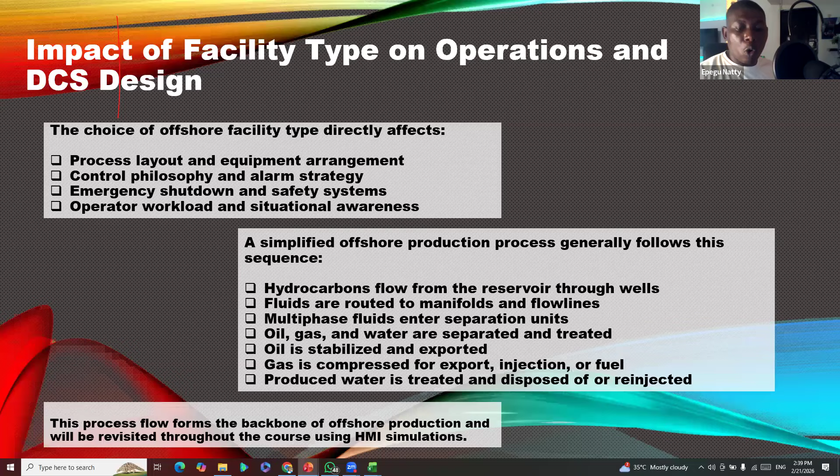So this process flow forms the backbone of offshore production and will be revisited throughout the course using the HMI simulation.

So next, let's look at types of oil and gas licenses and leases. Now, why are we going to talk about licenses? We are going to be operators, right? We are not management staff, so we are not going to be talking about signing contracts and all the rest. But why, as operators, do we need to understand the types of licenses? Let me give an example.

Let's say you are carrying out an interview, and the person interviewing asks you, okay, where we are situating our platform is OML 112. Now, immediately they mention OML 112, what should come to your mind is that this company has the license to drill, the license to produce, the license to process and export, right? Now, there's a license they will give to a company where they cannot produce, they can only drill. In fact, there is a license they can give you where all you can do is just explore, you cannot even drill, right? So having this knowledge will make you understand that, okay, I want to work in this company, and this company, they are doing so and so thing. OML, so and so, they are actually operating, they are drilling, and then they are exporting, right? So which is why we need to understand this aspect.

So let's look at some of the types of lease and licenses that are needed. Okay, so the first one is OML. Now, when I was mentioning the types of offshore platforms, where we have Bonga, we have Agbami, we have a lot of them, there are OML beside this. Now, the reason I did that is because I know I will come to this, and then we'll talk about why we need this. So OML stands for Oil Mining Lease.

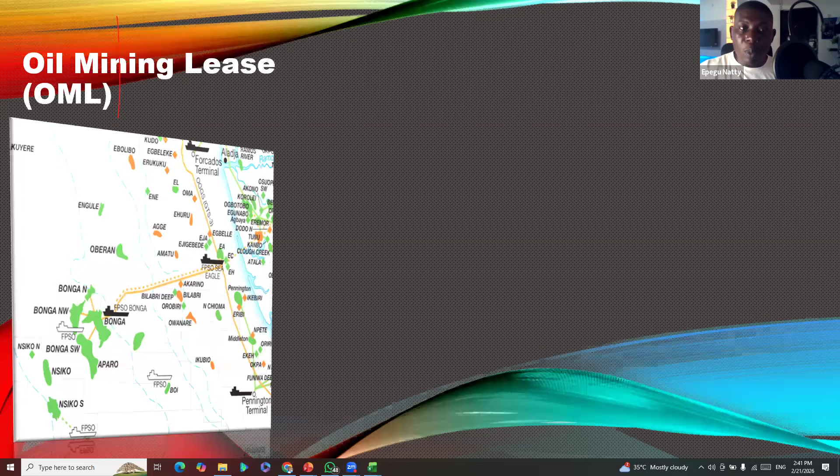Okay, so for the oil mining lease, what exactly is going on for the OML? Now, OML is a crucial government license. The government gives the company this license, and it grants the company the exclusive rights to explore, prospect, and produce oil and gas within a specific area, called acreage. There is a map, and you cannot encroach or exceed that map given to you. Every company has a particular map it can only work in within that region. You cannot just drive your FPSO to any region and start drilling or exploring.

No, they give you a license, and that license is what you use to carry out your activity in that particular region. They use coordinates to map out this region for you. This OML lasts for 20 years. After 20 years, you need to go for appraisal and also see if you can get another license again. Now this comes after OPL, so we're going to look at OPL. OPL is the oil prospecting license. We'll look at that later on.

So the purpose of this OML is for production and development of crude oil and associated gas. The area is typically offshore or onshore. So if you hear OML, it doesn't mean it's just offshore, even onshore platforms are within these licenses. For example, OML 111, OML 123, OML 133, and so on. The operators have the full rights to drill, produce, and market the crude oil within that lease area. Duration, like I said, is 20 years, and you can renew it after.

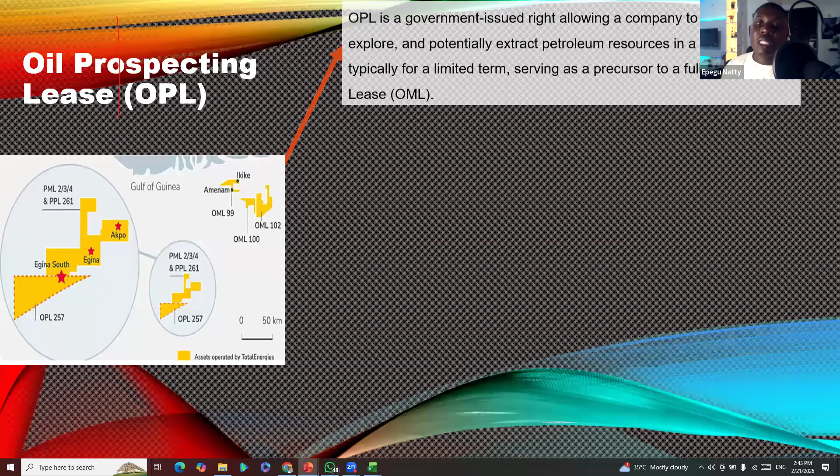So OPL stands for Oil Prospecting Lease. This is also a government issued right, allowing a company to search, explore, and potentially extract - potentially, so you cannot extract, you can only search and explore. After you search and explore, you need to go and get the OML. You need to meet the government and say, okay, I've seen oil, I want to drill, I want to produce.

Okay, so they will not convert the OPL to OML for you automatically. I'm not talking about this in terms of management, I'm talking in terms of operator level, because you need to understand that if I see anywhere they say OPL, it means this place, they are not going to be drilling - I'm going for just exploration. So that is E&P. Okay, let's move further.

So the purpose is simply exploration only, with no production rights. Typically it's given for just 5 years, so after 5 years you have to renew it. When oil is discovered, you have to convert the OPL to OML for you to be able to start drilling and production.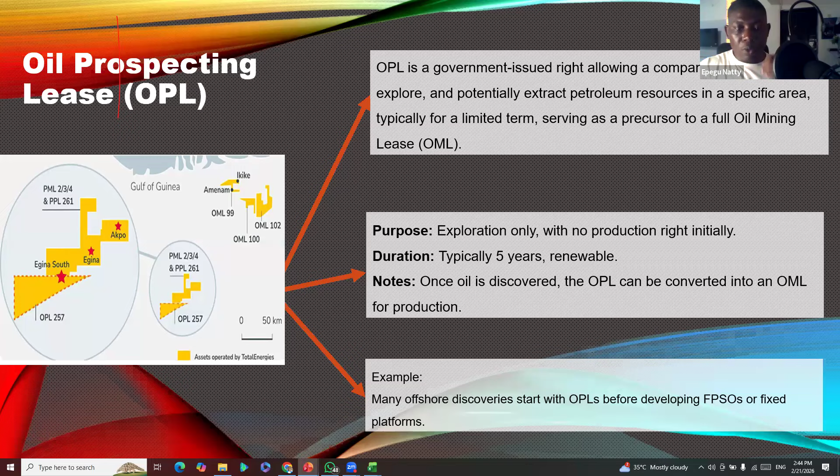So examples and stuff, let's go further. The next one is the PML. PML is almost like your OML, right, but it's a new version of it. PML stands for petroleum mining lease, and it's also called exploration blocks.

So PML primarily stands for petroleum mining lease. It's a crucial license granting rights to extract discovered oil and gas, replacing the older term oil mining lease, which is the OML. Now OML is still functioning, right? You can still see people saying OML this, it's still there, but we have a new version of it called the PML. So if you hear PML, it's the same thing as OML - let's not confuse with this.

So this is also for 20 years. And a block is also the same thing - it's a geographically defined area of the seabed or offshore territory that the government grants an oil and gas company for exploration, development, and production. So if you hear block 17, it's the same thing as OML or PML, okay? It is essentially the legal footprint within which a company can operate.

So blocks are defined by precise coordinates, latitude and longitude. They can vary in size - shallow water blocks are smaller, while deep water blocks are usually very large, to cover multiple reservoirs, because it is not easy to move your vessels down to deep water and just explore a small region. So they have to give you a large region so that you can explore a lot, to be able to see different ways to convert it to start producing.

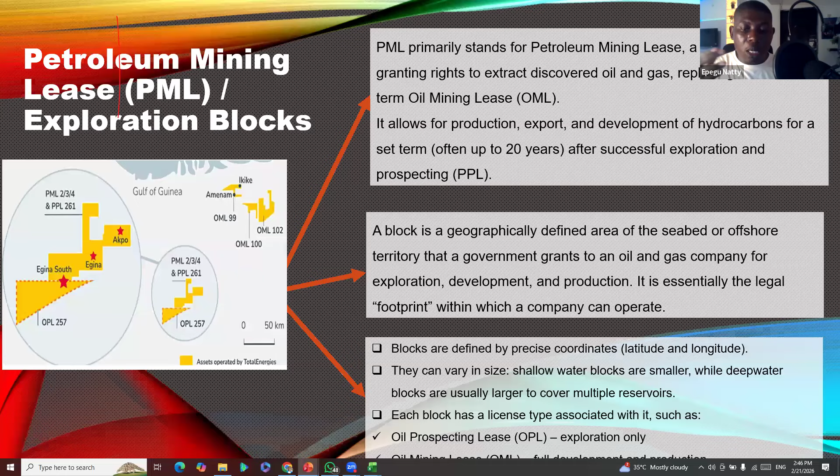So each block has a license type associated with it, such as OPL and OML - I've talked about all this. So PPL is almost like your OPL, the same thing, so no need to explain this any longer, it's the same thing anyway. Okay, so the role of operations and control room.

So this is just a summary. We're not really talking about the entire role of operations and the control room because we'll do that later. But for offshore operations, you have to know that the control room is where operators monitor process conditions: temperature, pressure, flows. Let's look at this image. You see temperatures, pressure, and LT, the level transmitter. You look at the levels, observe the trend, open graphs, and confirm if the level is above or below. You look at everything and ensure it's stable. That's what you do at the control room.

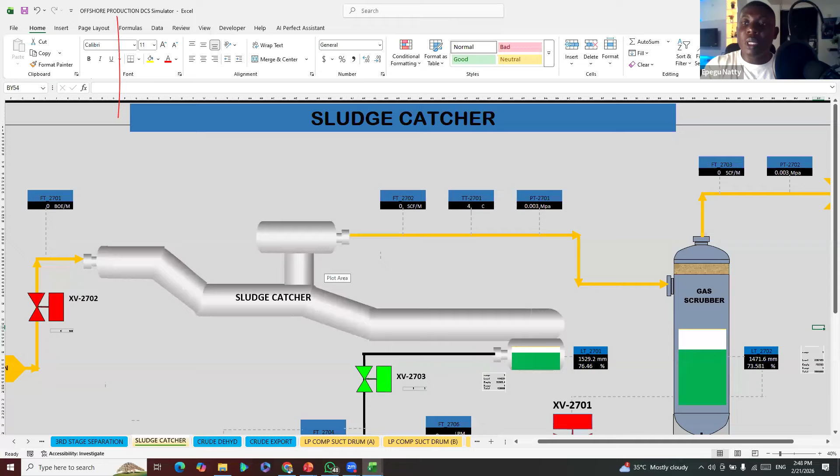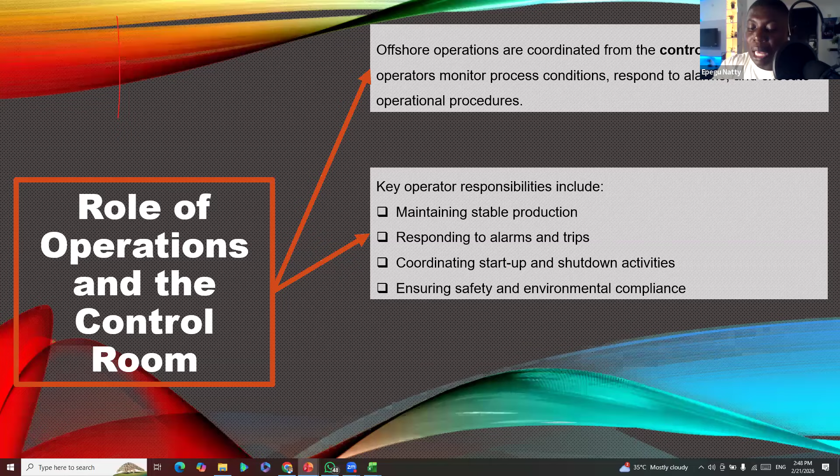So, key operator responsibilities include maintaining stable production, responding to alarms and trips, coordinating startup and shutdown activities, and ensuring safety and environmental compliance. The DCS provides operators with real-time visibility of the plant. From the DCS you can see everything about the plant, right? It's like the heartbeat of the plant.

Because if you go to the field, you cannot see what the DCS operator is seeing. You can only see the skeleton of what is going on, but the DCS is seeing the internals. Temperature rise inside the towers, they're seeing it. Inside the separators, what is going on, the temperature or the pressure, if it's increasing or reducing, you see everything. So it's just like seeing the heart of what's going on.

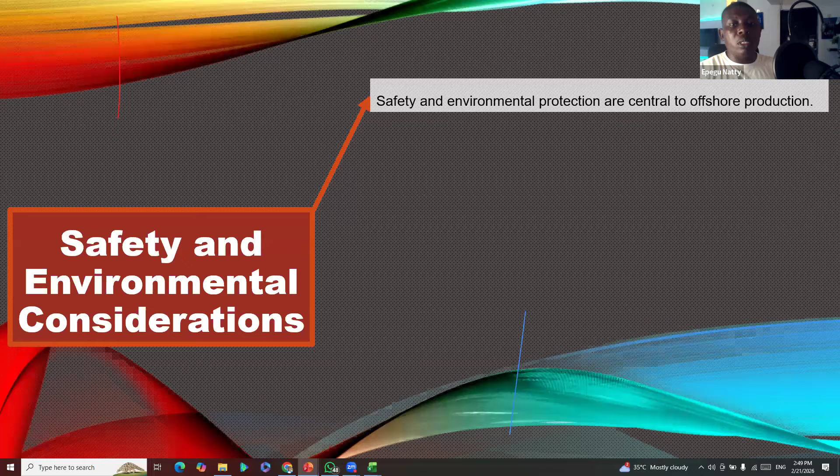So basically that's it for the role. Now safety. Safety is also very important, like I mentioned, safety, operations, and environmental factors are things to consider during operations. The key consideration here is hydrocarbon containment. The key function of process safety personnel is to contain any leakage, from flanges, from vessels, and from drain lines. You have to contain everything because those leakages are what cause accidents. So you have to contain all of them.

Now, fire and gas detection. Designing fire and gas systems, and also troubleshooting and checking them, is the role of process safety personnel. We also have the emergency shutdown systems, the ESDs.

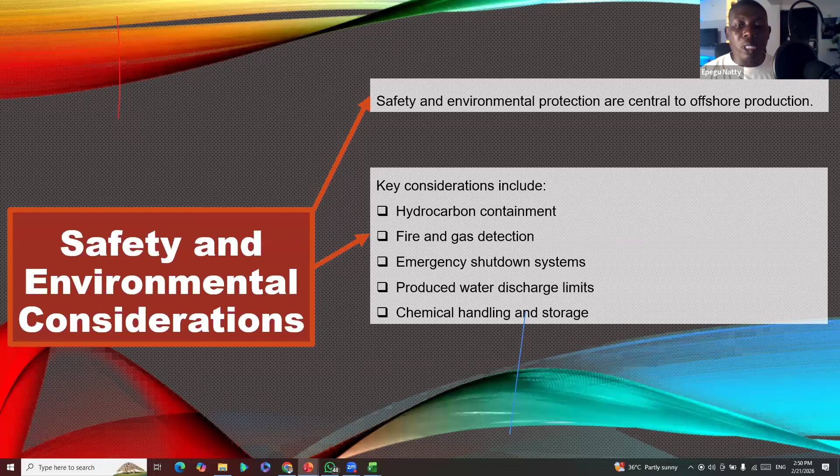We have produced water discharge limits. These are things the safety officer has to look after. Before water is discharged into the open sea, they have to check the limits before it can be discharged, because of regulations. Then there's chemical handling and storage. These aspects strongly influence offshore process design and operating philosophy.

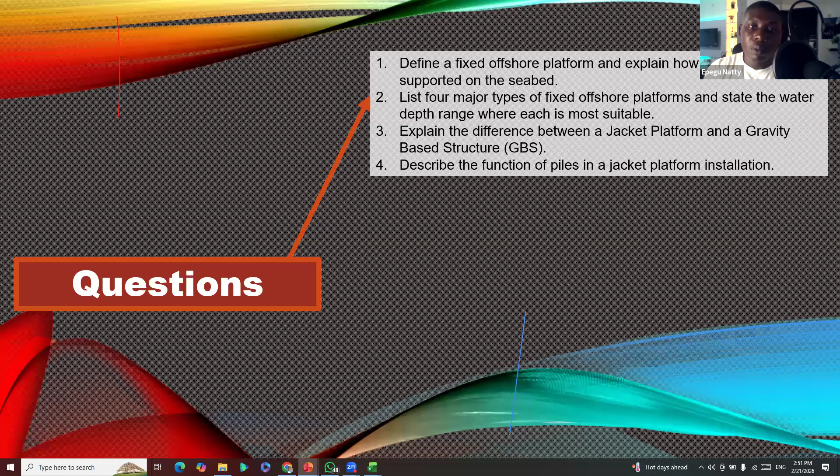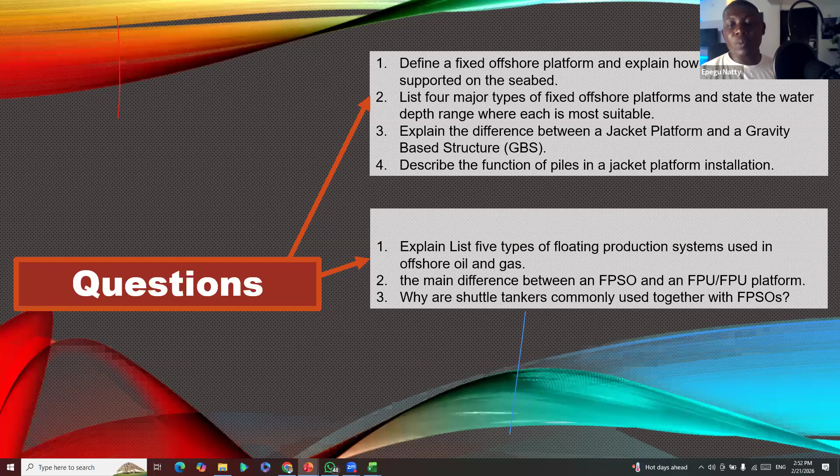Next, explain 5 types of floating production systems used in offshore oil and gas. Then the main difference between an FPSO and an FPU, floating production unit. Explain the key difference between them. And then, why are shuttle tankers commonly used together with FPSOs? Why are they used with FPSOs and not with a fixed platform? Explain that.

Tell me why, and then list and briefly explain 3 common types of offshore petroleum licenses, which I just mentioned. List and explain them. Then, what is the difference between an exploration license and a production license? I believe I've done justice to all these questions, so ensure you answer all of them, as this is part of your assessment.

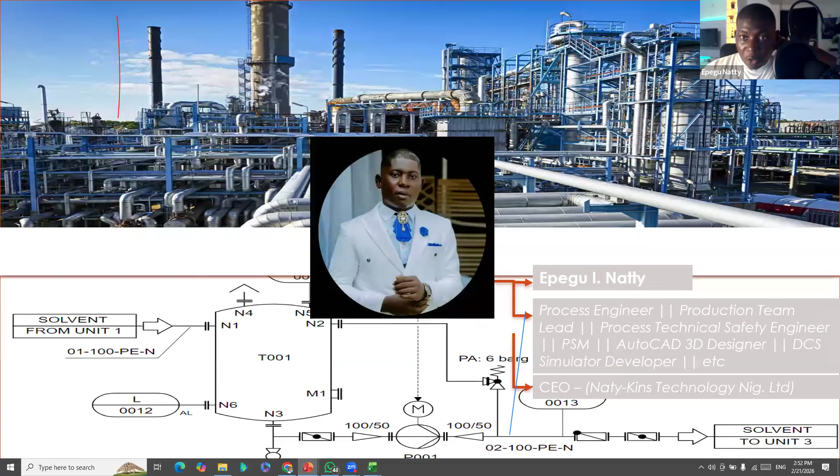Okay, hello, hello, good afternoon. Hello, yeah, one after the other. Good afternoon, please. Afternoon, sir.

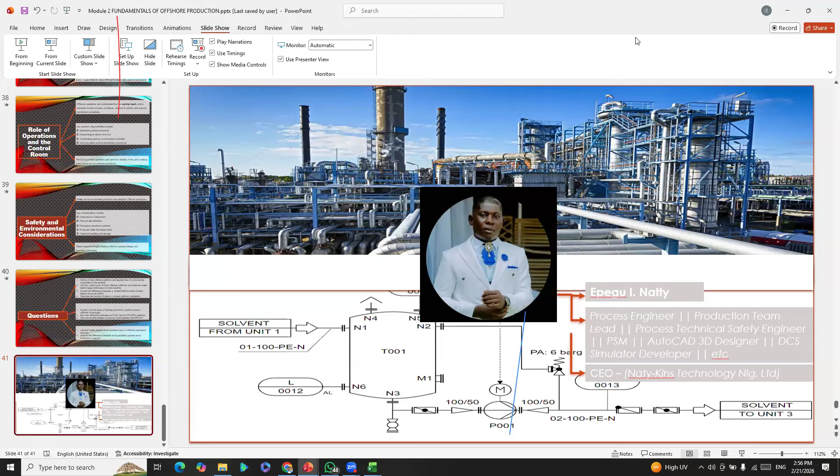How do we get these questions, or rather the whole video, for those that entered late? Is it only through YouTube? Yes, I will post the video on YouTube, then send it to the group. Also the material I used for this training, I will send it in the group too. Thank you very much sir. You're welcome.

You said the next class will be tomorrow or next Monday? I'm from Angola, yes we have class next. Oh that's on Monday. Yes, Antonio. Same time on Monday by 1pm.

Can we look at the timing on Monday, because Mondays are usually very busy for almost everyone, especially in Nigeria. I don't know if it will be possible. I'm just pleading that we review the timing on Monday, since it's normally a very busy day, to when people will be less busy.

The problem with changing the time is it will affect other people. Since you are in Nigeria and your time works for you, if I change it, others might not be okay with it. So maybe on Monday we can do a vote in the group, and vote on whether to shift it an hour or two ahead. If everybody accepts, we can do that. For me, I don't have any problem. I'm just trying to make sure everybody has a time they can be present in class.